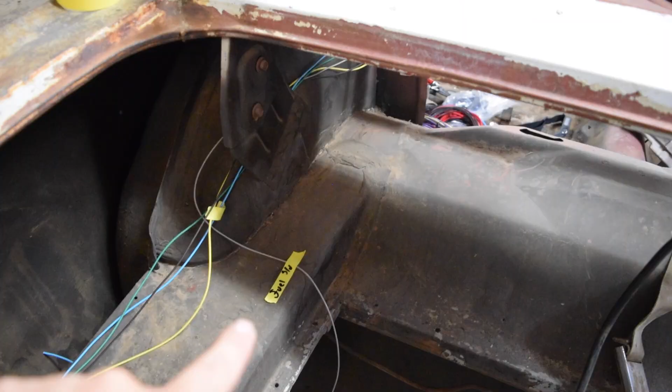As you can see, we have fuel sending unit, radio, ignition, gauge cluster, but we have no engine wiring. Any guesses on what we might be doing today?

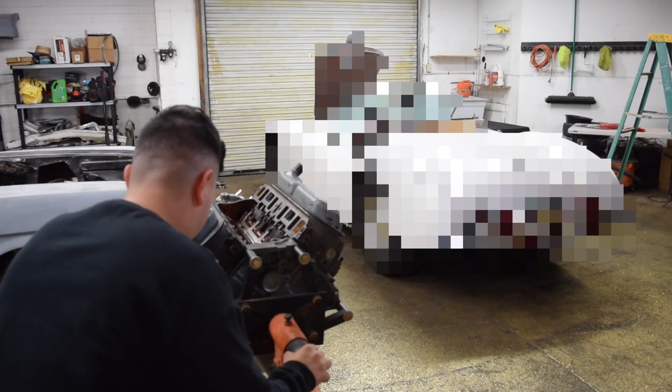Don't ask me why there's a creeper on the engine we just rebuilt. Oh wait, you guys aren't supposed to see that yet. It's a secret for now, but our Patreons have seen it. Let's get it out of the way. There we go. Then we can get this guy into the Mustang.

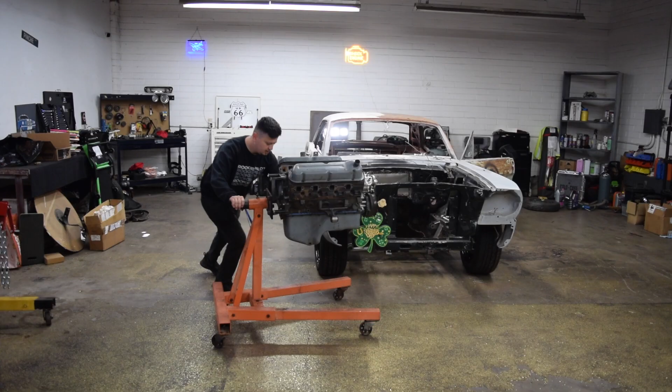Because our intake has not arrived yet, we're just going to lightly cover the valley here so we don't get any crud in there.

All right, and we're off. So the engine is now on the cherry picker. I don't really need to bolt on the transmission just yet, but I'm going to do it anyway just so it's not sitting on only the engine mounts.

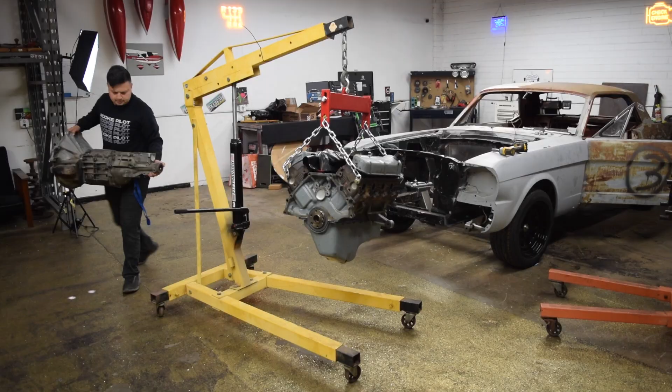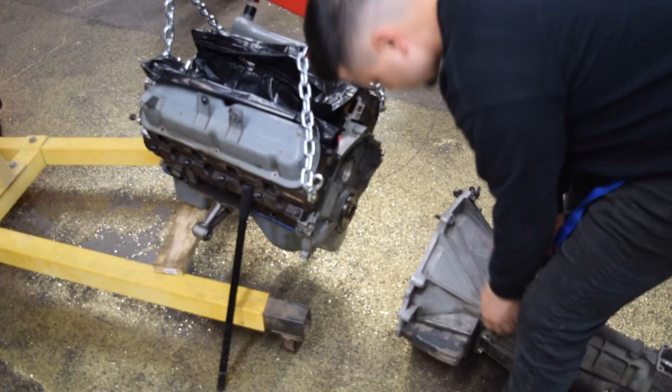Down again she goes. Let's do this without breaking our back. Oh my, I didn't really think this through. Or maybe I did.

All right, now we can pump it up. Without dropping it on ourselves, let's get this thing in there. Going to angle the transmission side down. It seems like every time I put this engine in, I struggle a little more every time.

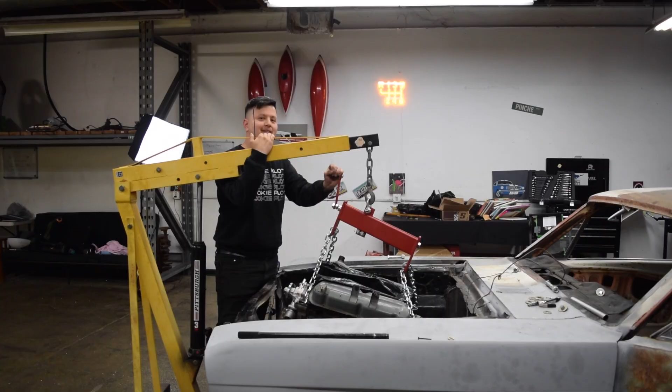That is insanely loud. How is it so loud? It's comical how loud this thing is.

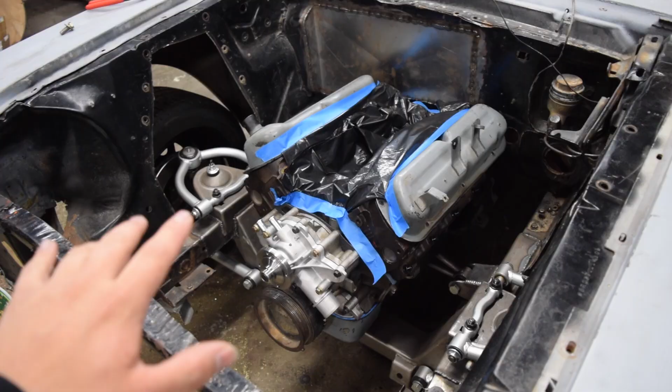Okay, the engine is back inside. That took way longer than I'd like to admit, but now you guys can get a more accurate idea of how far back we pushed the engine. You can see we have plenty of room for activities up front, as well as how low the engine now is compared to stock location.

Anyway, with the engine installed, we can now start routing and planning our attack for the engine wiring. But first, shout out to our friend Mike for keeping us caffeinated in this episode.

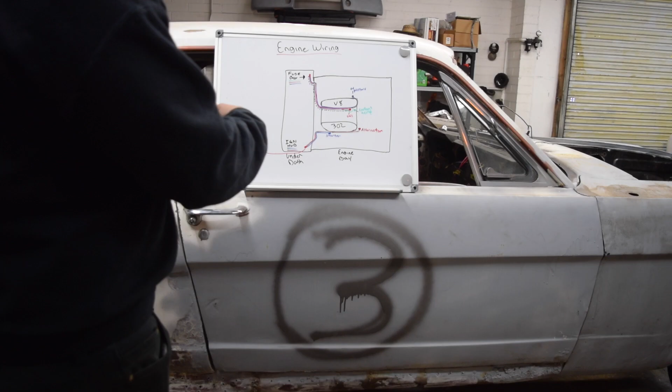So in order to make my life easier, I've made a rough diagram showing how I would want this engine wired. As you can see, there is not a whole lot going on in this engine bay. There's not a lot of connections, not a lot of wires to route. And if you guys remember, I had stated that I want this engine bay fairly clean and fairly neat.

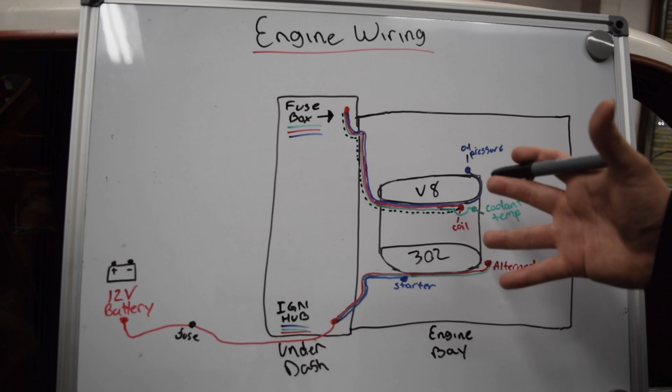In order to keep everything neat, I am going to redesign the way that this engine bay was wired. So once again, this is our engine wiring diagram. Right here in this location is the fuse box that we installed in the previous video. And from that fuse box, there's only going to be about 4 wires going to the engine.

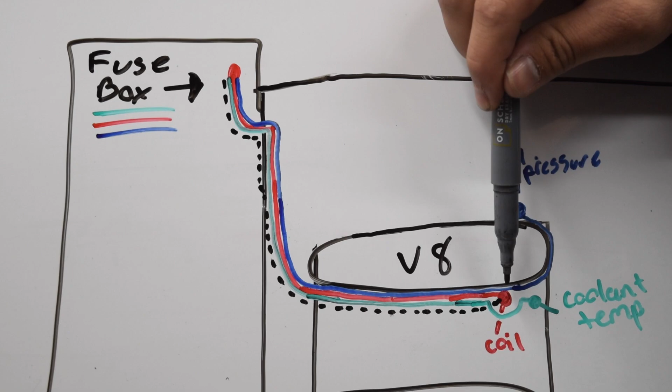One, this blue wire is going to read our oil pressure. This red wire is going to go straight to our coil. That's what's going to give the coil our power and our distributor its spark. And then this dotted wire also goes to our coil, that's going to be our tach wire, so that's going to tell us what RPM we're at. Then this green wire is going to go to our coolant temperature sensor. So that is what's going to be on the left side of the engine.

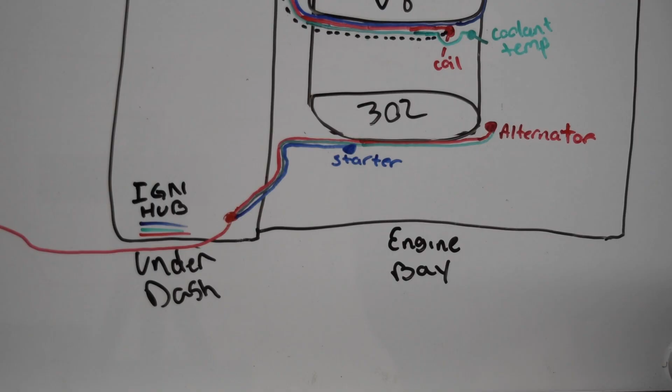As far as the right side of the engine, there is only going to be about 3 wires. One, this blue one is going to go to our starter. The red wire is going to go to our alternator, which is going to be the power. And the green one is going to our alternator as well, that's going to be the exciter wire.

So this way there is only really 2 bundles of wire going to our engine. This one has a total of 4 wires, this one has a total of 3 wires.

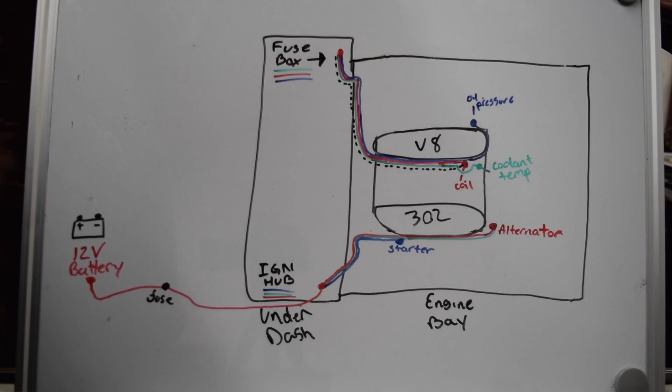But some of you might be asking, what is this ignition hub? Well, this ignition hub is going to consist of 2 of these mega fuse boxes, as well as our starter solenoid, which is therefore going to be powered by our 12-volt battery that's going to be either in the trunk or the rear seat with an inline fuse.

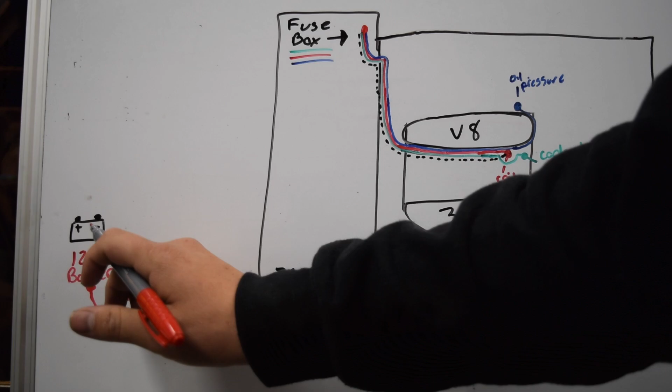So let's try to simplify this. We're going to get 12 volts of power from the battery that's going to go through a fuse. That's going to hit our starter solenoid, which is therefore going to be split off into these mega fuses. One of the mega fuses is going to power our fuse box, while the other mega fuse goes to the alternator.

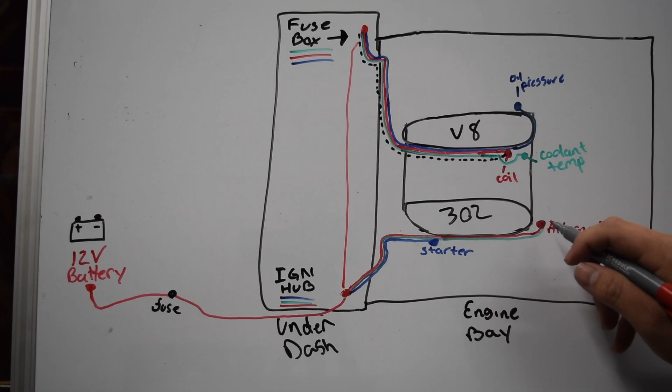Once again, this is a redesign on how it was from the factory. This ignition hub was basically over here in this corner, sitting right about there. But we want to eliminate most of the wires in the engine bay, so that has now been relocated under the dash.

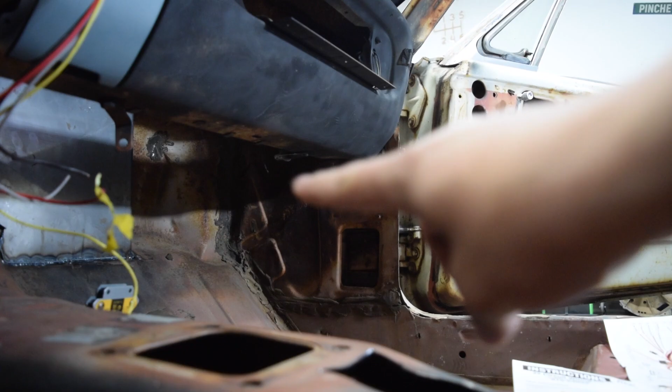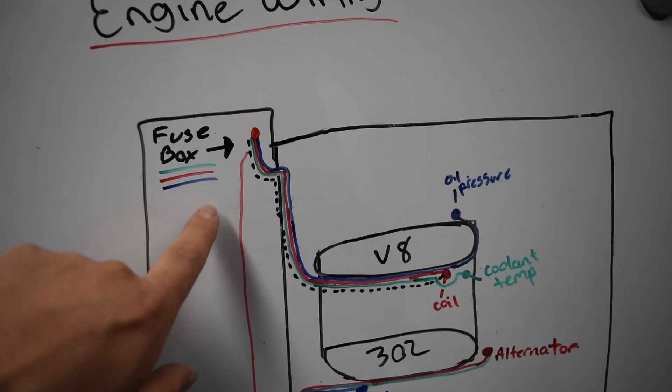I'm thinking about putting it somewhere on the underside, probably right here. Since that ignition hub is somewhere under the dash along this area, it has to come out somewhere along this side, but there are no holes nor passageways, so we have to figure out how we're going to do that. Whereas the driver's side that holds the fuse box does have a passage, sitting right about here.

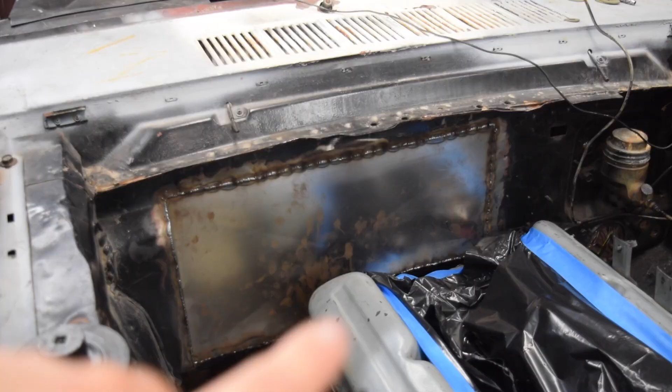That hole is actually the factory wiring harness pass-through, so we are going to be using a factory hole. But for the ignition hub, we don't have any passages, so we have to make one, and we pretty much have the freedom to make it wherever we'd like.

We could put a hole dead smack in the center here that will feed the starter and alternator wire. But what I'm thinking will look cleanest is making a hole along this 90-degree bend, which serves us pretty good because it will give us a straight shot out to the starter location, and from there we can route the wires to the alternator.

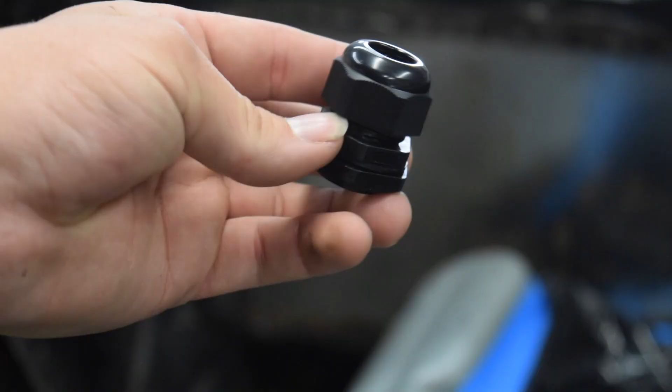There are also a couple ways we can do this. We can drill a hole and put a grommet, or drill a hole and use one of these relief tubes - I'm not sure if that's exactly what they're called. This would get sandwiched somewhere along the firewall, with just a little thing sticking out, and we could place it anywhere along the firewall. Then this will feed our wires outwards.

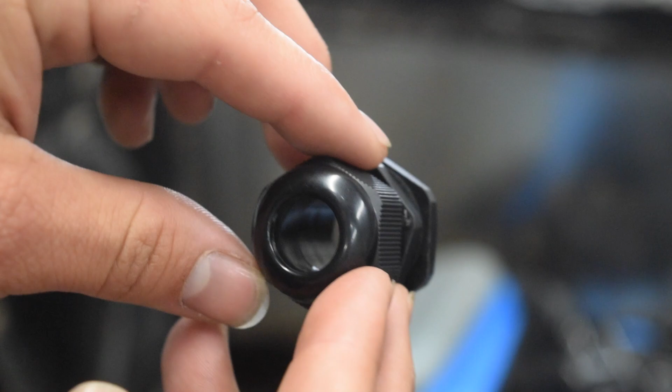These are pretty cool. I believe they'd probably last longer than a regular grommet, and you can see how smooth the inside is, so you won't get any chafing on the wires. That's just an idea - we might have to use a grommet, we might not.

Remember guys, we're in the planning stage. This is not how it was designed to be, so we're making our own blueprint here.

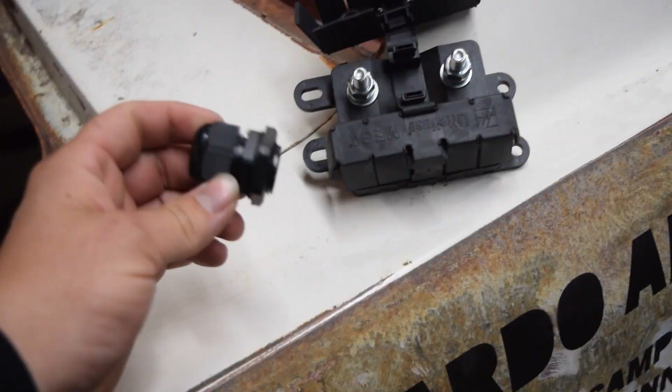That's enough with planning though, let's actually start doing something. If you guys remember in the last video, we just bunched up the engine wiring harness and stuffed it under the dash. All right, I got the two bundles out.

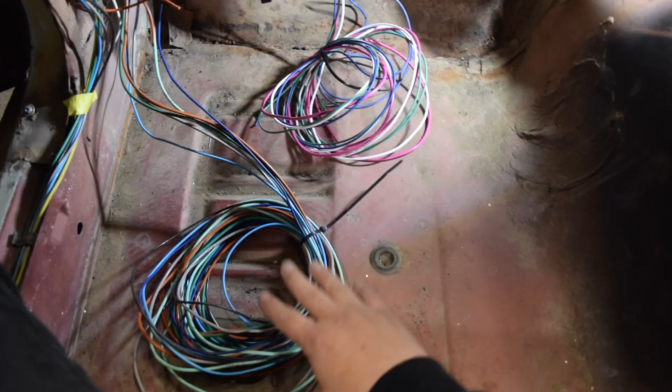Both of these are going towards the front of the car, but only one is going towards the engine bay. This bundle right here powers the headlights, turn signals, parking lights, horn, electric fan, so we're not going to worry about this right now. This bundle right here, this is the one we want.

This one is going to power our ignition, coolant temperature sensor. It's going to give us our tach reading as well as our oil pressure, just like we saw in the diagram. In a bundle like this it might look like a lot of wires, but it's only 4 wires, and those 4 wires are going to go through that square hole we talked about earlier.

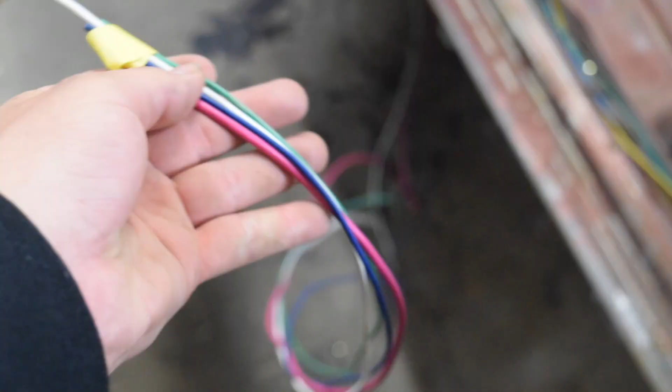I undid the bundle for the 4 wires and taped the ends together just to make it easier to fish through that square hole.

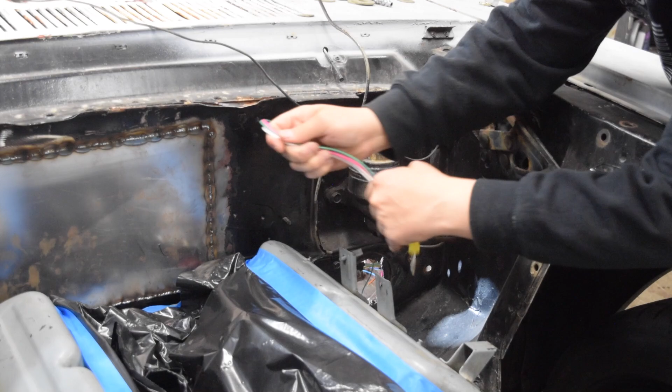All right, you can see all of our wires are routed through. You can also see how much extra wire they give you, which is really good because you have the freedom to do whatever routing diagram you want, or just keep it stock.

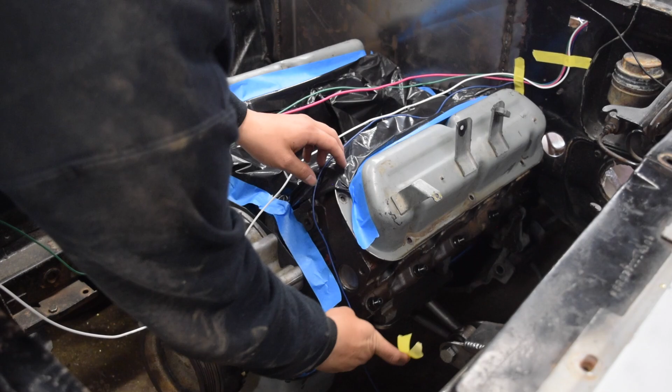But now we can get a solid idea of what we have to do, because every single one of these wires is labeled. So this blue wire is going to go down to our oil pressure switch that is down here. So what I'm going to do is grab each wire and tape it to roughly where it's going to be cut.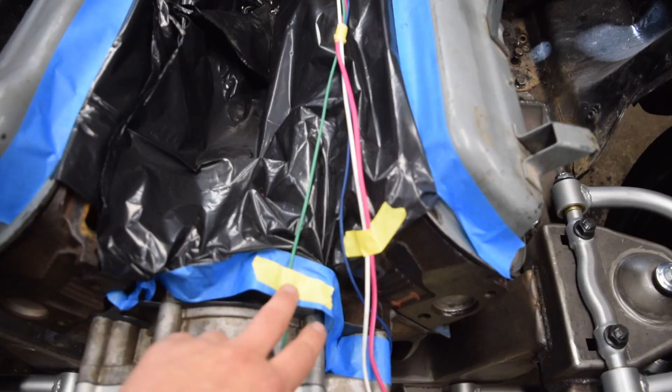Our green wire follows the same route and ends right about here. This is where the coolant temperature sensor is going to be bolted in the car, so this is where the wires should end. Pink and white wires both go to the coil, which is going to be somewhere about right here, I think.

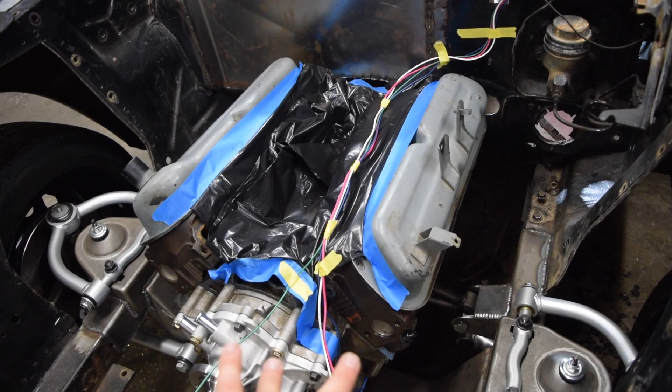So what does this all mean? Now we know how to wrap this wiring harness. All of these are going to be wrapped together right about until here, which is where all the wires tend to split off and go their own direction. So all the wires are bundled up everywhere until right about here, and from that split, that's where they go to their individual locations.

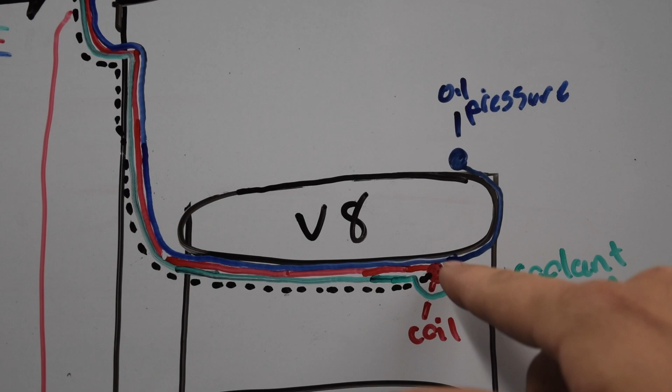All right, so we have the left side of the engine routed and done. Not done as in everything is connected and this engine is going to start up - you guys know what I mean.

Now we get to start on the right side of the engine, which should be the fun part, and also the difficult part because we're redesigning how it's supposed to be. And we could also explain what this ignition hub is.

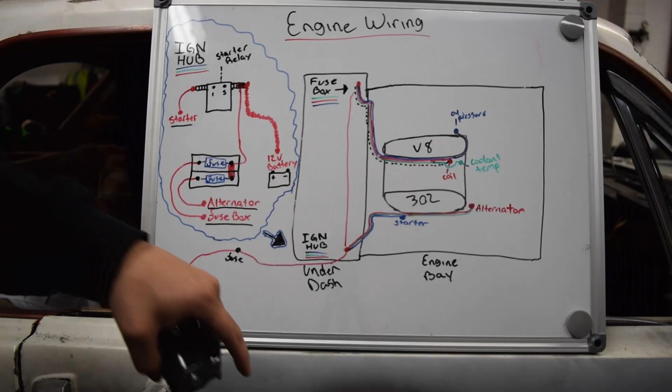The ignition hub consists of pretty much two things: our starter relay and a bus bar, or fuse blocks if you want to call them. These are going to hold a 150 amp or so mega fuse.

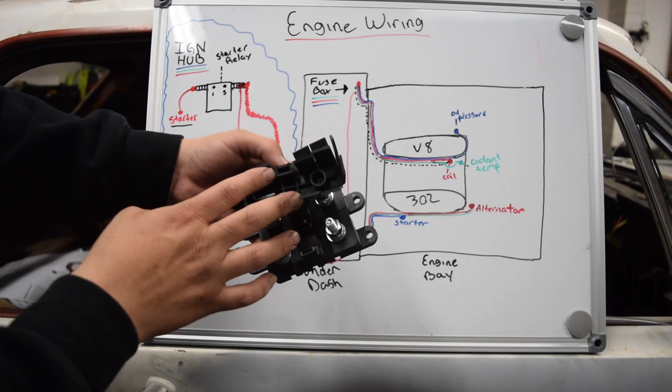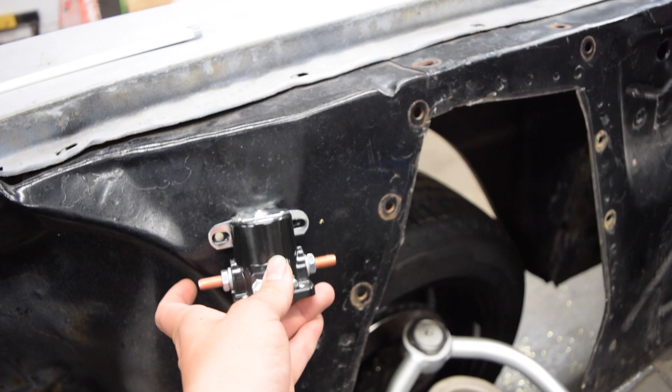All right, so here is an exploded view of said ignition hub. As you can see, we have our starter relay here, which is going to be mounted upside down. I say upside down because this thing is normally mounted right here on the fender apron.

The battery post would get connected to this side, and the starter would be connected to this side. So it is normally mounted like this, but we are going to flip it upside down because we have since relocated this to this location. So the power now needs to go to the back of the car, whereas the starter wire needs to go to the front of the car.

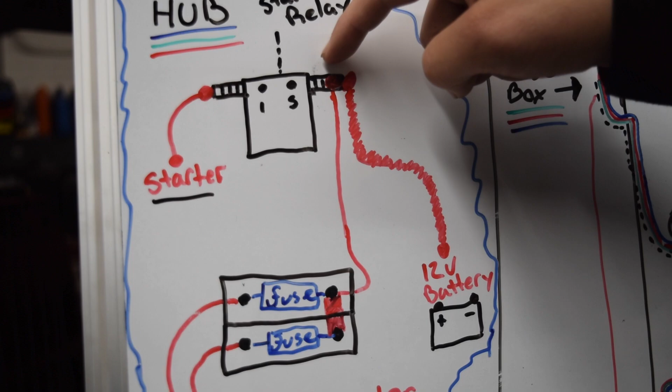So once again, on the battery side of the starter solenoid, we're going to have our battery, which is going to be located somewhere in the trunk area. That's going to hook up to this post, and also along with that is going to be hooked up the wire that goes to our fuse block or our bus bar.

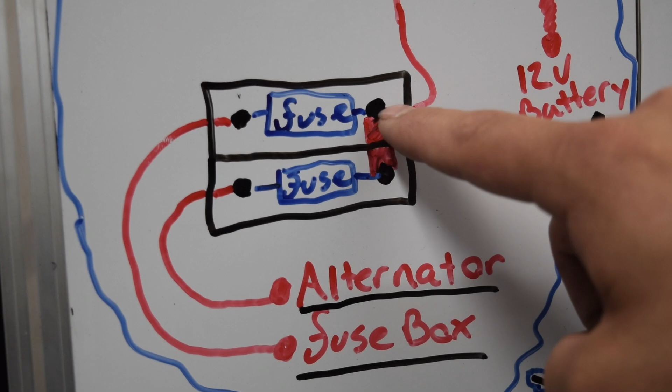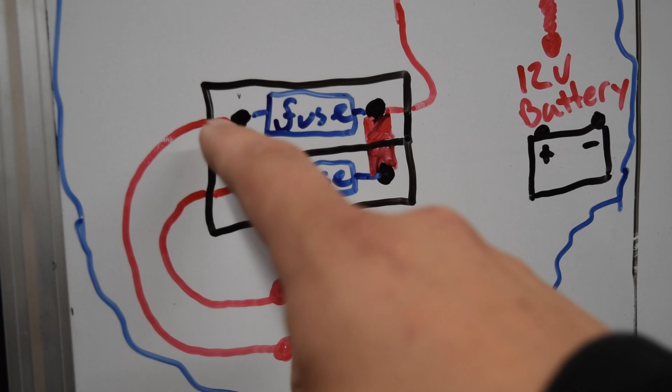Once that power comes down from the starter solenoid, it's going to feed power to one of these fuse blocks, but there's going to be a jumper that'll be feeding both of the fuse blocks. Then there's going to be a fuse on each one of these, which is going to be about 150 amps probably, and then each one of these is going to feed something different.

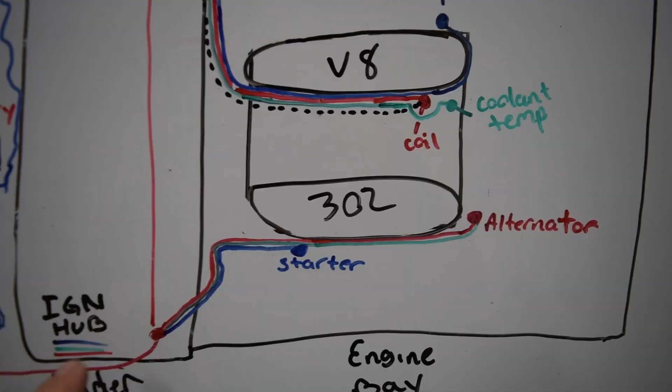So one of these is going to feed the fuse box. If you guys remember earlier, we said that there's going to be a wire that feeds the fuse box from the ignition hub. And then the second fuse block is going to have a lead towards the alternator. And that's how it looks over here - we're going to have this red wire that goes towards the alternator.

There is not a lot going on here. The most difficult part is just designing or deciding where you want the things to go. So I guess let's start deciding.

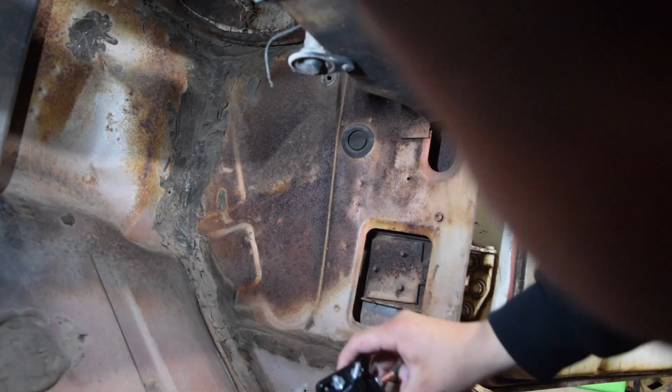Like shown in the diagram, our goal is to mount it somewhere in the passenger footwell. So not only do we have to decide on a location for this starter solenoid, but we also have to decide a location for this bus bar. And I know I keep switching the name between bus bar and fuse block - bear with me, they're interchangeable.

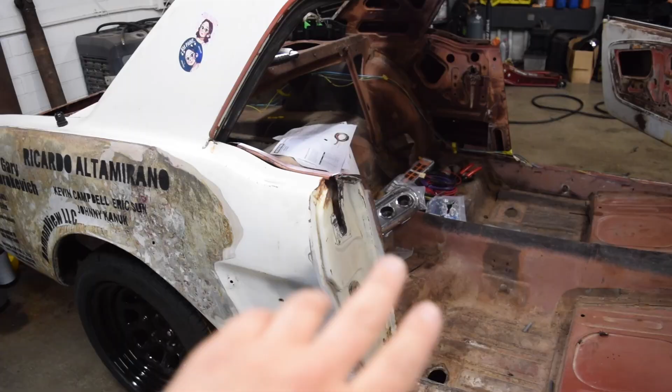So since the battery is going to be sitting somewhere in the back seat or in the trunk, it's going to have to be routed through the quarter panel, under this door sill, and then through the underside of this A-pillar, through the inside of these, and then it'll have to pop up somewhere here. So therefore, I think I would like the starter solenoid to sit somewhere right here-ish, because the battery cable is gonna pop up through these holes and then get tied in right there.

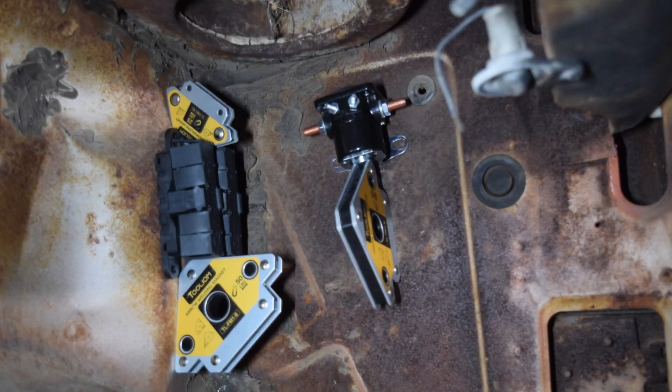As far as the bus bar, I believe I would like it mounted somewhere right here. All right, so I could already see some complications with this setup because, like I said, the battery wire is going to come out through one of these holes and then go straight to this terminal. But then this terminal also has to power the bus bar, so therefore the wire will have to go over and do some kind of weird bend.

And we want to try to simplify this so there's no weird bends or awkward angles for that wire to get kinked or bent. Okay, I think we found the solution. So once again, the battery cable is going to come from one of these holes and it's going to get hooked up to this terminal right here.

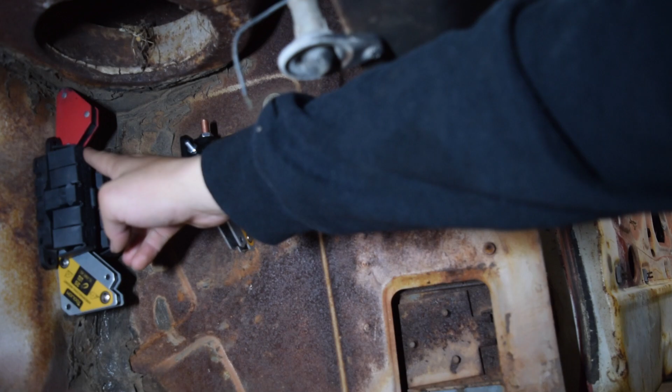Okay, let's try that again. So there's going to be a battery cable that connects here, and another cable that links this to the bus bars, one of them, and then that's going to be jumped to the second one. And then one of these, probably this one, is going to be linked to the fuse box, and this one is going to go to the alternator. The terminal on the bottom right here, which you can't see because of this magnet, is going to go to the starter.

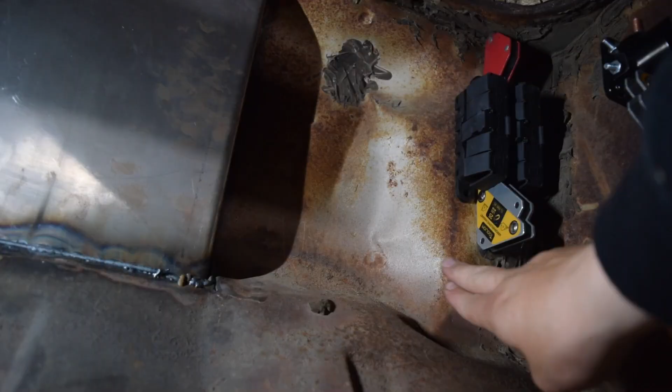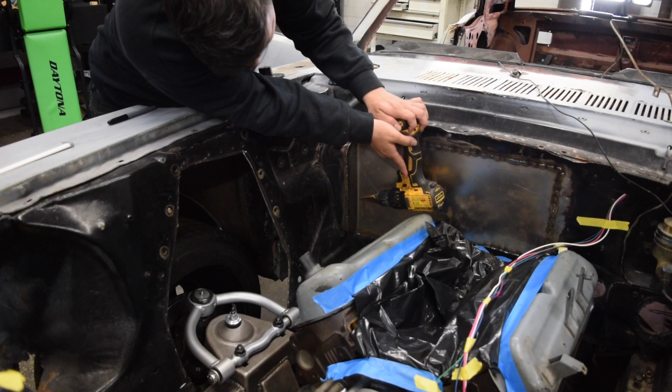So we have two wires going to the engine bay, the alternator and the starter, which are going to be fed this way through this 90-degree bend on the patch panel, coming out roughly in this area. But this is something I probably should have done before installing the engine, because now the drill does not fit where I want it, nor does it properly fit on the bottom side because of this hump. So do we have to remove the whole engine to make one hole?

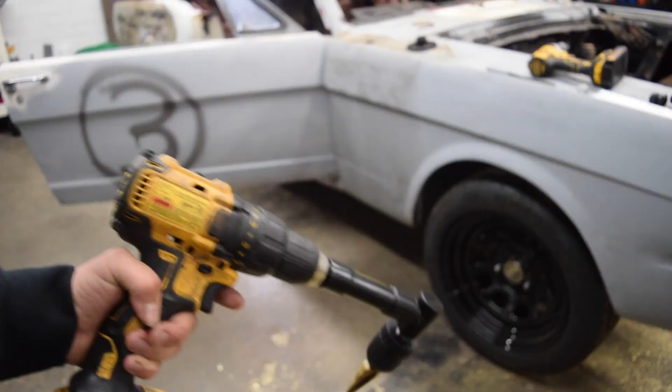1 hour and 30 bucks later, we have a 90-degree bit, which I was going to need sooner or later, so here we are.

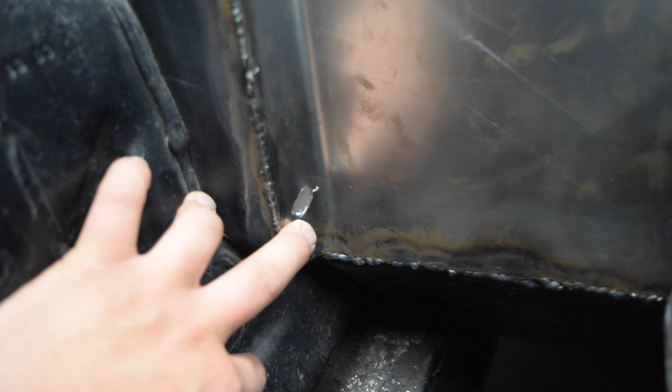The step bit bent the metal. So now it's not only not a circle, it doesn't look as bad on camera, but these little plugs are not going to sit flush. Let's see if I can tap it back into place.

All right, that actually did straighten it up better than I thought. And that hole is finally done. It was a lot more painful than I thought it would be, but it's done.

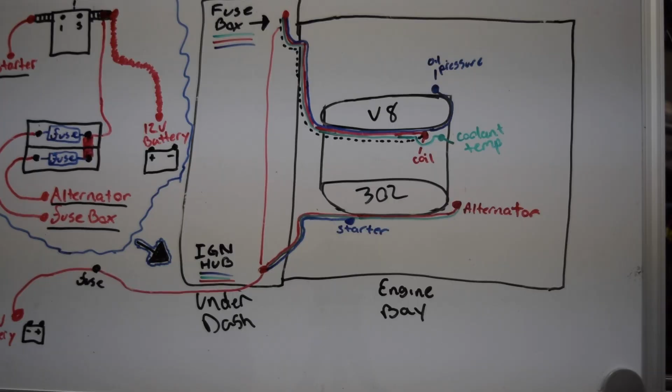Now we can see how this is going to look. I think that was worth the struggle because this plug looks pretty damn cool right here. It's not too obvious, it looks clean, and it'll head directly where we need it to go. This is what it looks like from the inside, and now you can see that from the plug, it'll go directly into the bus bars. Cool beans. So the plug that we just made sits somewhere about right here.

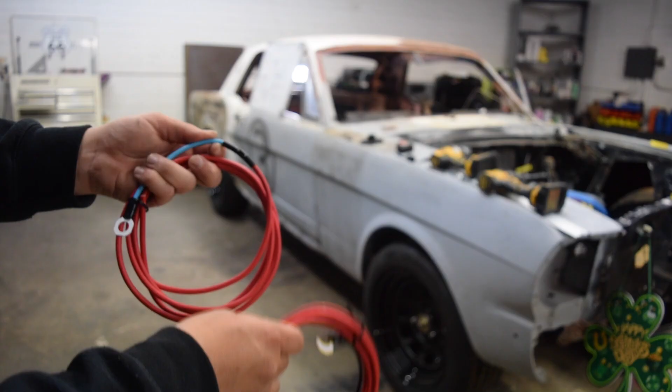So now we're going to route the starter wire as well as the alternator wire. Luckily, the Speedway harness includes both of the wires that we need. They do come with a fused link under this heat shrink. They are a bit thin. I might go with something different, but we're going to use these for the routing purposes. I don't know, maybe we'll stay with them.

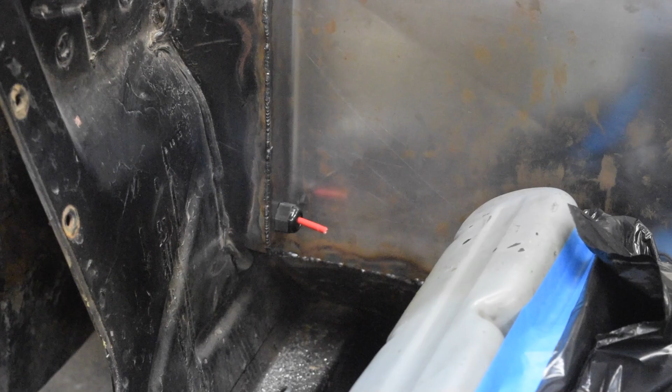Okay, so I'm going to fish both the alternator wire as well as the starter wire through here at the same time.

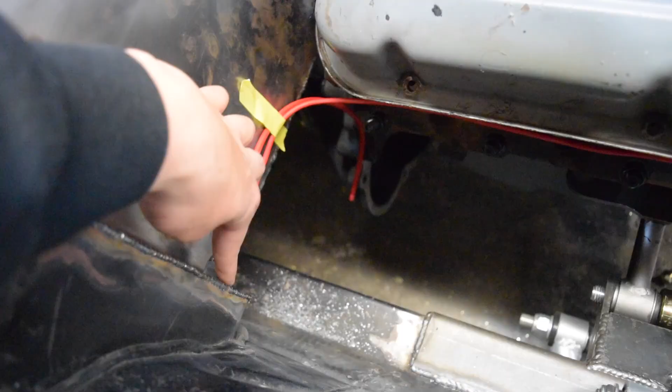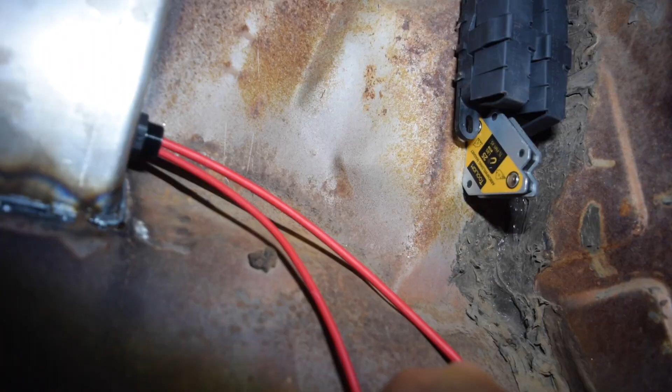All right, obviously this still needs to be zip tied and wrapped with that Tesa tape, but that's what it's going to look like. As you can see, it goes from the ignition hub out of this port. We have one wire dropping off right here where the starter would be, and then another wire that goes all the way up here where the alternator would be. Our alternator wire is going to connect to one of these bus bars about like this, and the starter wire is going to connect to the starter solenoid on this terminal.